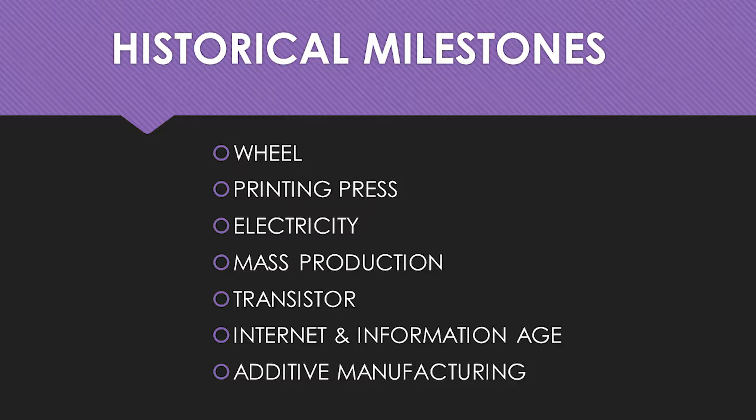I put 3D printing, or additive manufacturing, on this list. These two terms are synonymous in my mind—3D printing and additive manufacturing. I'll explain why I say that in just a moment.

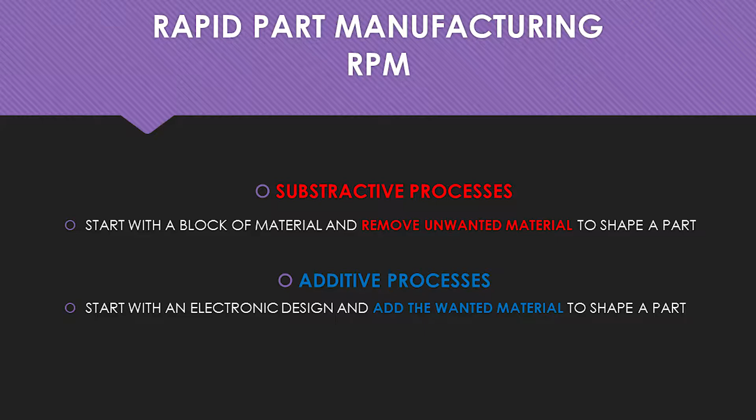Let's talk about rapid part manufacturing. There are two main processes when it comes to part manufacturing. The first is subtractive processes, where we start with a block of material and remove the unwanted material to shape the part—machining, milling, and other techniques for removing material. 3D printing is an additive process, where we start with an electronic design and add our wanted material to shape the part. Believe it or not, that makes a huge difference in how you actually build parts, and I think I can show that to you in just a moment.

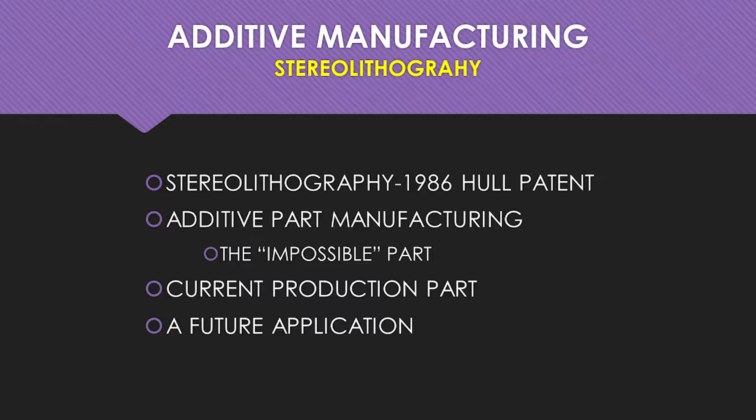This will describe the steps I'll take in my talk tonight. First, I'll describe how and when 3D printing was conceived. Next, you'll witness how an additive manufacturing process can produce a part that's impossible to make using traditional manufacturing processes. Then I'll show you how a major company has adopted additive manufacturing to produce a highly complex, high-value part in jet engines. Last but not least, I'll give you a glimpse into the future—if I were 10 to 15 years younger, I'd be printing homes in Armenia. I'll talk about that in just a few moments.

Stereolithography—the simplicity of this initial concept is most impressive. If your dentist ever hardened a filling using a light beam, you've experienced the basic concept of this revolutionary invention. My wife tells me certain nail polish is set by exposing it to ultraviolet light—maybe you women know about that. Chuck Hull is the inventor; he's now 79 years old. Chuck was working at Ultraviolet Products Incorporated when he invented stereolithography in 1983.

The company sold photosensitive liquid photopolymer inks that hardened when exposed to ultraviolet light. Stereolithography uses a beam of ultraviolet light to harden one cross-section of a part, additively, after another, until all the layers create the solid object.

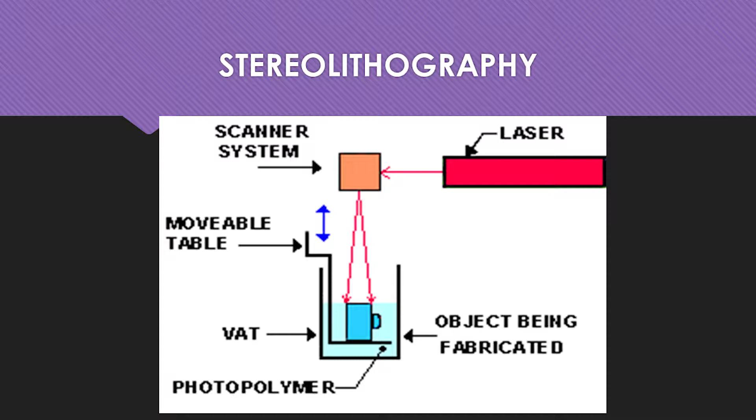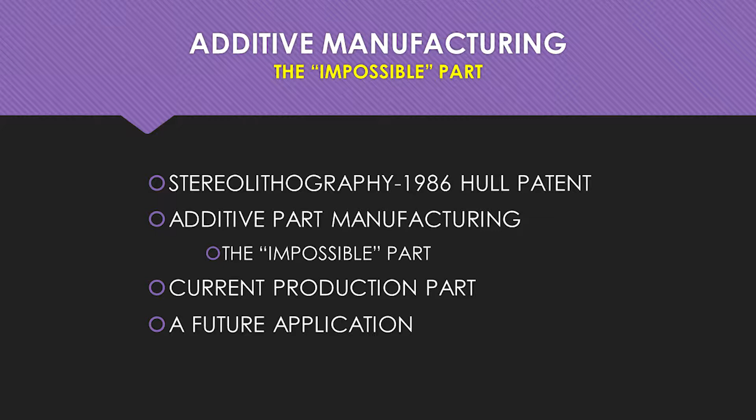This next slide, every time I see it, my mind is blown. It's this impossible part—impossible, I say, because of making it using traditional processes. May I have the next slide?

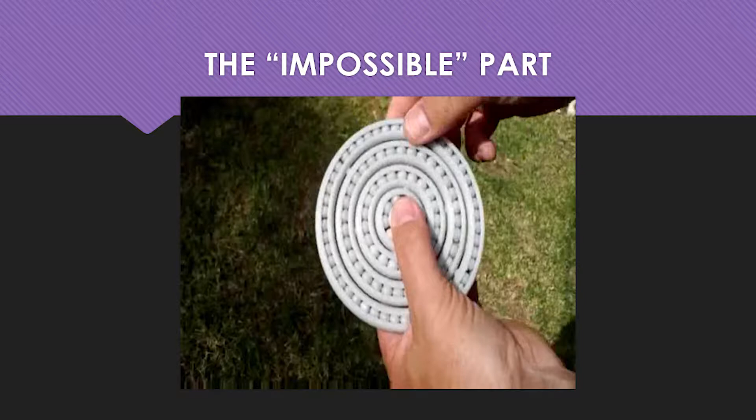Now, there's 91 tiny balls in this product. Here it is right here. If you would just move that along, stop for a moment. You can see there's liquid plastic being deposited very rapidly, and it's being guided by the electronic design of the part.

If you move it along a little faster, okay, there's the finished part. It has a substrate to it, so the gentleman will then remove that part from the substrate. If you move it along a little bit further, now he's going to remove some of the unwanted material.

Keep going, go to 3.4, 3.5. So he's loosening up some of these parts. Go a little further. Okay, here we got it.

Now look at that. That is amazing to me. I don't know if it's amazing to you, but that's made as one piece—all those parts together, all at one time, produced as an additive process. That is remarkable in my mind, and that is what is going to change a lot in the future. It takes time for these things to happen, but they will happen. It's just a matter of time.

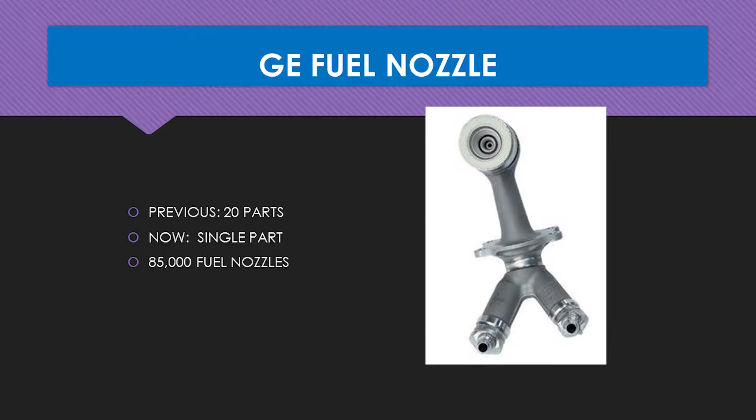If I can see the next slide. This is a nozzle, a fuel nozzle that's being made. There's 85,000 of these fuel nozzles that will be made. If I could have the previous slide once more. Okay, this is for the GE engine 90, and they plan to produce 100,000 3D printed components into that engine—not into the one engine, many engines.

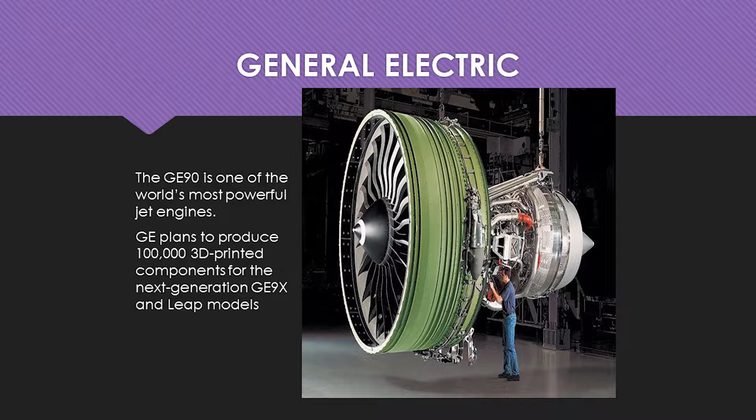Henry Ford is before our time, even before my time, most of our time. He's credited with the benefits we've realized from mass production. What was the benefit of mass production? Because we could produce many, many parts, but they had to be standardized. You got the benefit of low unit costs because of that—much lower costs than if you had to make each part in a custom manner. The benefit of additive manufacturing is that you can change each part by just tweaking the electronic model of that part, and that has a huge implication.

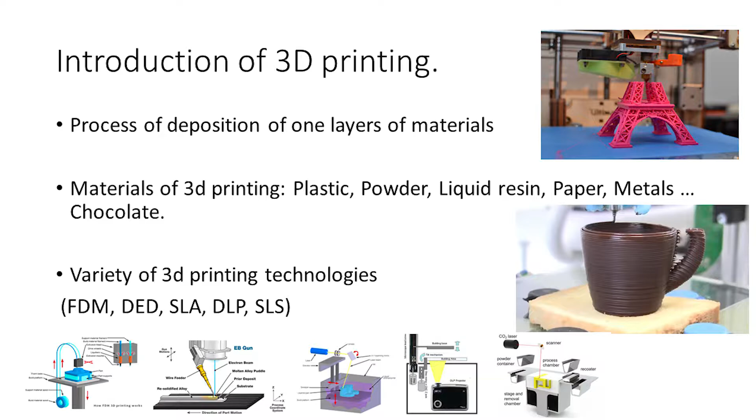There are very different technologies used for printing. I don't know if it makes sense to go through them all, but the one on the left is kind of putting blocks together. The next one is kind of soldering. The next uses a laser to put blocks together from liquid. Another, much faster way, is just projecting and burning the layer onto the object. And the last one is a powder printer.

The next big advantage of 3D printing is fast prototyping. It gives you the possibility to test your idea faster, so you can try things and see if you fail or not. For example, I have here some bottle. If you try to manufacture it in the usual way, by creating a mold and designing, it will take a few weeks, and if you fail, you have to start again. While here, it will take just a couple of hours to make this, and you can save it for next time. If you want to change something, you don't need to start from the beginning - you just open the file, make your changes, and print it again.

In this sense, I would agree with both of the previous speakers. From one point of view, there is nothing new we can actually create - it is either good or bad, and it's a question whether there's bad or just an absence of good. So in this sense, Berge is right. But on the other hand, it will change our environment and quality of life. It's not new - you could do it probably 100 years ago - but now you can do it quicker, faster, and create impossible shapes that would take a very long time, or be practically impossible to create for tiny pieces, etc.

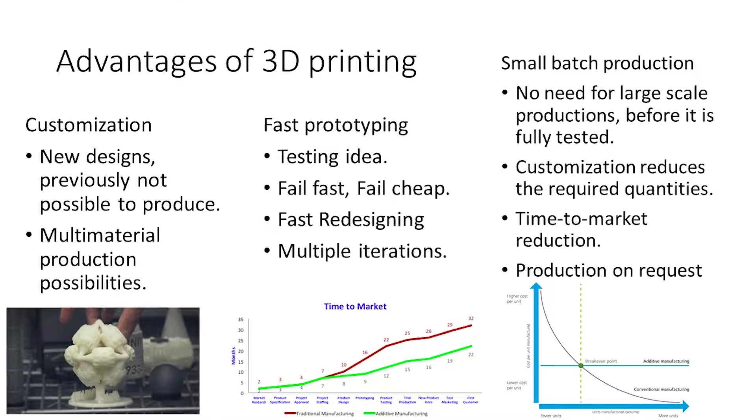Now, how will this help Armenia? Does Armenia need to go through this process? Well, everybody should follow this, and sooner or later everyone will, as the previous speaker noted. But there are some problems that could be solved right now with these technologies. Let's name a few.

First of all, it's the small market size of Armenia. It's a very tiny country. The remedy for this is small batch production, so you can just have a printer and print whatever you need for your own needs.

The other big problem for Armenia is a lack of natural resources. If there are no resources, then you have to use your brain. You have to be technologically competitive, use your human resources, and follow up on science and technological news to stay at the frontier of developments, so you can compensate for the lack of natural resources.

The other problem for Armenia is logistical dependencies in the region. It's surrounded by not so good neighbors, let's say. There are two closed borders, and sometimes conflicts or misunderstandings with others.

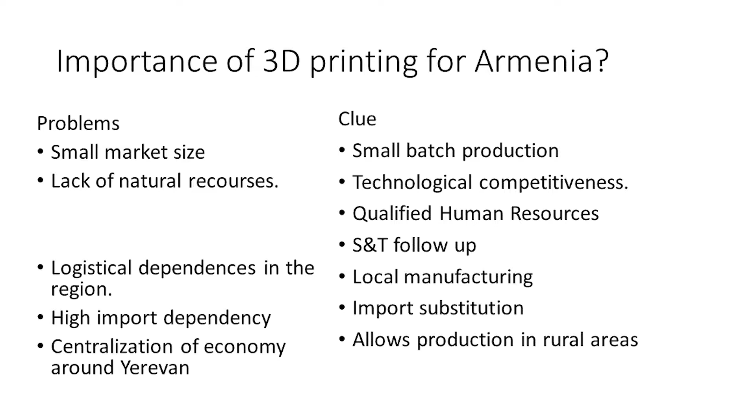This problem can also be solved by local manufacturing. If you can manufacture it here, you don't need to bring something from China or wherever else. High import dependency could also be solved partially by import substitution, and centralization of economy around Yerevan can also be addressed through 3D printing, because you can go to a village, become a good designer of 3D models, have a printer, and just print whatever you need for your community or your product.

So those are good things about 3D printing that could be useful for Armenia, but of course there are some drawbacks. For example, rapid technology change can cause your investment in technology to become useless just a few years later, because technology becomes quickly cheaper and much better over time. The machines that cost a few million just a few years ago are today about $100,000 or $200,000, and we expect them to become about $20,000 in the not very far perspective.

Another problem here is conventional mindset. In order to use these technologies, you have to think in 3D. You have to understand what this 3D printing is and how to use it, instead of thinking in the conventional way.

Lack of technology awareness is also a problem, because everybody knows there's something called 3D printing, but nobody really feels how it works and what it is. That's why you're very welcome to come see what's there and what kind of models we have here.

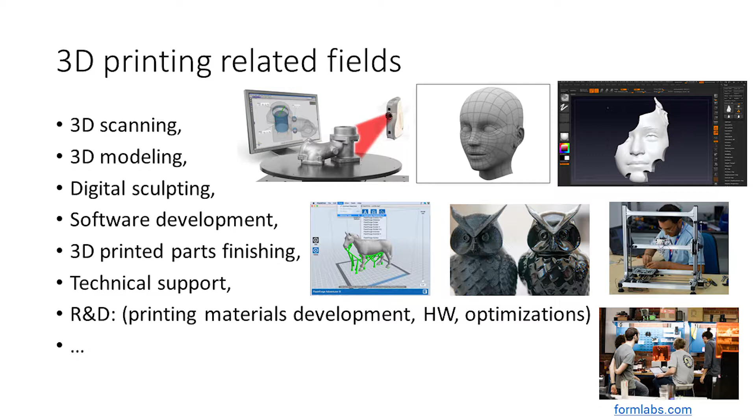So those are examples of these industries. Well, let's step forward. So, applications - what kind of applications and what kind of revolutions do we have today in this industry.

So dental industry, please click. The dental industry is revolutionized by just printing and simplifying changes in dental models. Jewelry is the next one - it's already heavily used in jewelry preparation, so you can take existing models and make modifications. There's also modeling, for example here you see a 3D printed shoe. You can print and modify the shape of your shoes as you want.

There's also an architectural revolution, where instead of bringing your model to life by hand, you can print it instead. There's also a construction revolution - you see a 3D printed house here that was also spoken about before. This is a real printed 3D house. I think it's really nice. I think only the glasses here are not printed.

The rest is printed. And there's also medical application, which you can see in the next picture. Can you distinguish between these two ears? They just look the same. And not only this, but biological parts - muscles are being 3D printed today.

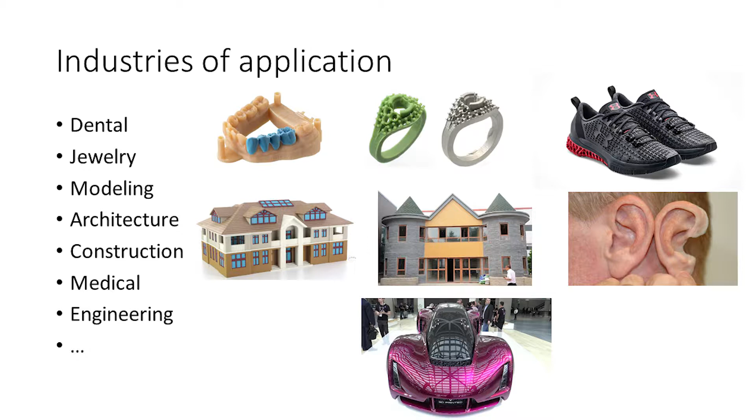It has also changed the industry of engineering. This is a 3D printed car, purely 3D printed. I think that's nice - you can print your own car and modify it for your needs. You can add something, etc. So you shouldn't be the same as all the others.

Now, how can this be implemented here in Armenia? There are many different ways of implementation. We can just wait while everyone else has it, and it will come also to Armenia - this is the simplest way. But I think much more effective is to have a kind of success story.

So if some kind of actor will start to work, just to show what kind of novelties they are, people will come and touch everything with their hands. They will see metal printed materials, true color printed materials, very fine arts and architectural pieces. So this all has to be on the table for people to come and see and be inspired. Or else they have to spend a lot of money by themselves to go see it somewhere else - but that's unreal. So I think creation of a success story is a very important thing for this.

And it should also be done together with community building. You cannot do everything alone - you have to build a community around it, support people to work in this field, and spread information about it. This event is actually one of these steps. So that's generally all I wanted to highlight today. Thank you for your attention, and if you have questions, then later.

Thank you. HRAYR, I know you have only recently come to the US - have you been able to visit any of the 3D printing centers? Yeah, today we've been at Formlabs. We had a nice presentation and show around. We saw quite nice printings, and I got one, the dental one. So yeah, it was nice. So you had your teeth fixed, is that right? I hope to do it tomorrow. Oh okay good, yeah I'm keeping it in my pocket, you know. All right HRAYR, thank you very much for your presentation. Thank you.

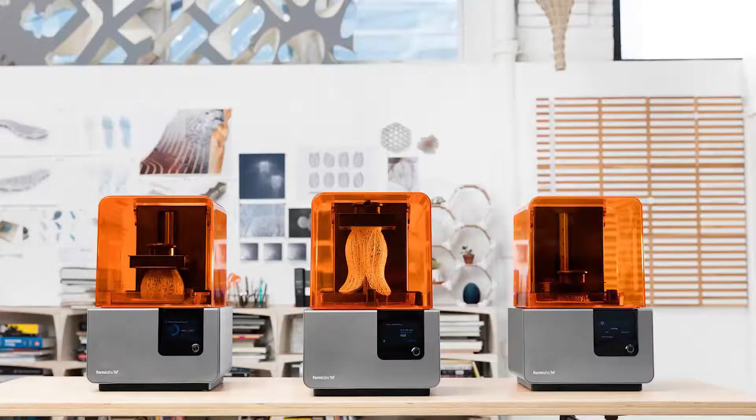So this is our main product, the Form 2. I really appreciated the opening presentation because we talked about stereolithography, which is actually the first method of 3D printing, invented by Chuck Hull in the 1980s. What Formlabs did was take that technology and we were the first to offer it in an affordable desktop package. We use stereolithography, using light-sensitive resins, and a laser to draw the shape. That's what hardens the material and builds it up.

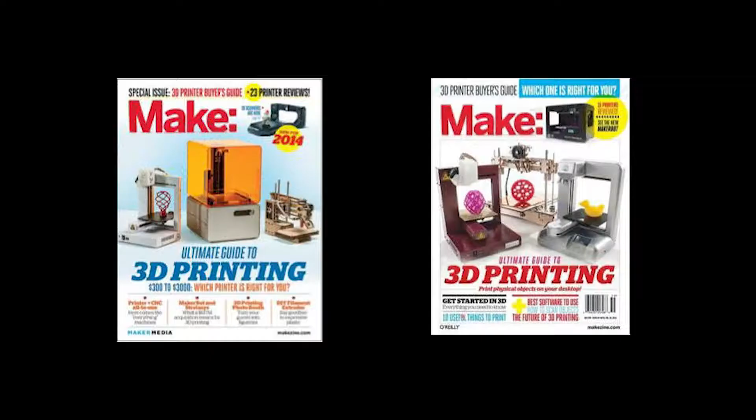It's $3,500, so that's what we mean when we say accessible. This is our original product, the Form 1, launched about six years ago. At the time, affordable 3D printers were the FDM kind, extrusion-based. This is an example from Make magazine, around 2013 to 2014. When we came out, this was a totally different technology, and there was literally nothing like it on the market, so people who knew stereolithography were really excited.

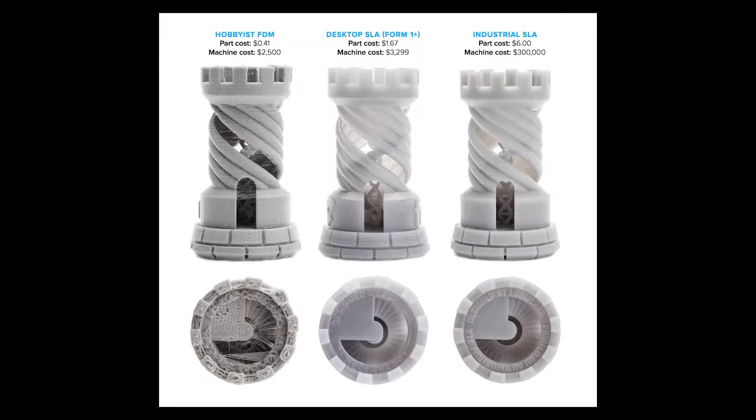This is basically what Formlabs is really good at. On the left you have an extruded piece—you can see the lines and surface details, the ridges of how it was built up on cheaper 3D printed parts. This is a piece off a $300,000 SLA machine, with a material cost of about $6. Formlabs created this new space of high quality, affordable 3D printing. Our piece is comparable to the high-end one, material cost is about a third of that, and the machine cost is significantly lower, about 100 times cheaper.

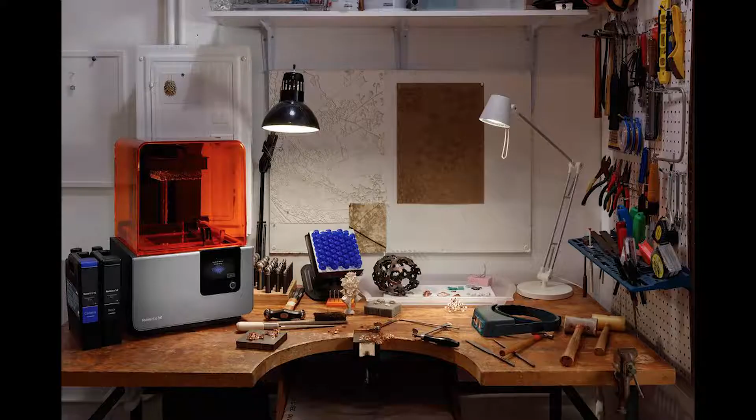This is summed up really well in the Wohlers Report, a research report about the state of trends in 3D printing. It says Formlabs defies the classification that traditionally separated industrial systems from desktop 3D printers.

This is what I've been through. The company today is 400 people. We've shipped over 35,000 3D printers in that time—absolutely more SLA 3D printers in the world than existed before Formlabs was created. We're local, we're growing, we're hiring a lot, so if you or anyone you know is interested in 3D printing, I'd encourage them to check us out.

Generally, most companies making physical products use 3D printing today. We work with big enterprises and small independent startups, and 3D printing is being used in almost every product development area you can imagine.

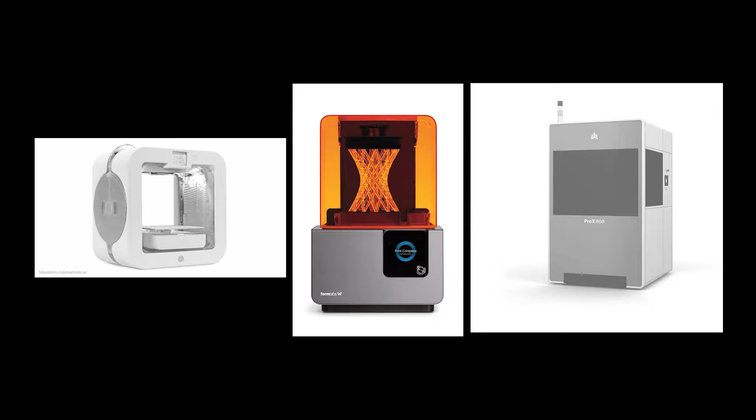This is Formlabs' methodology—we make professional stereolithography accessible. The big announcement in June for us was that we're taking the same model that's worked well for us in stereolithography and applying it to another 3D printing technology. Formlabs has announced we're working on an SLS machine, which stands for selective laser sintering. Again, these machines cost hundreds of thousands of dollars, but we've announced we're creating a product for $10,000. While this is more expensive and not in the everyday accessible range, for industries already using this technology, it's making it a heck of a lot more accessible than before.

I'll talk a little about this technology since it hasn't come up yet. SLS also uses lasers, but high power lasers. The material you're printing with is a powdered nylon.

This is similar to the process that's also used in metal printing. You drag across a layer of powder, and then you're heating it up to just below melting temperature. Then a high power laser draws the shape, actually melting the powder and fusing it together. Then that moves down, you drag across a new layer of powder, and you draw the next shape.

SLA, the original technology we showed, is particularly well known for beautiful surface finish of parts, so it's used a lot in looks-like prototyping or presentation models. Why people like SLS is that you're actually printing with nylon, which is an incredibly strong material. So this is used a lot by engineering, aerospace, or military industries where you need strong functional parts that are going into use as parts on machinery or for more end-use scenarios.

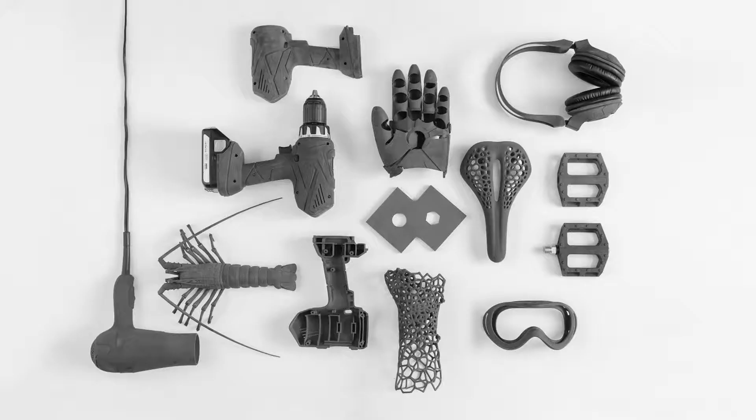This is a range of parts to cover some of the more unusual examples. This lobster was our example of a kind of impossible piece. It was printed in one go with articulated joints designed by one of our designers. The other thing about nylon is it's both strong and pretty flexible, so the headphones, for example, have a nice give to them, and the bike pedals are functional. All this stuff's been in use for some time.

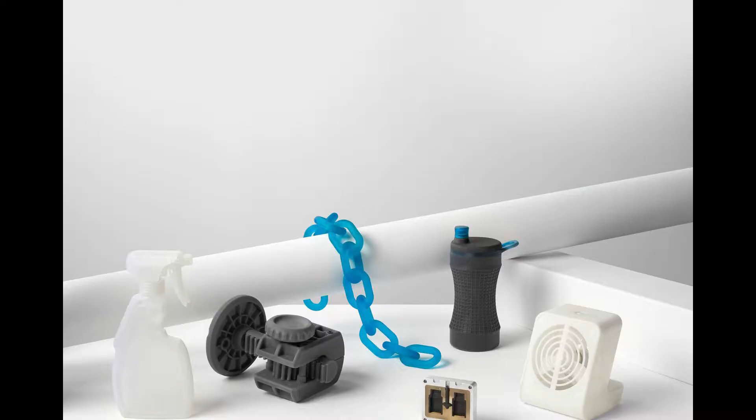The things I want to talk about in terms of the future of 3D printing that I'm particularly excited about are materials development. There's a lot going on in new materials, and that breeds opening up new applications. We've talked a lot about applications, and generally that phrase just means where 3D printing is being used in meaningful ways and in new industries. Sometimes by just offering a new material, we open up a whole new product category.

Dental already came up. About two years ago, Formlabs announced our first biocompatible resin developed for the dental market, and now dental is a huge market segment for us. So while we have a great platform, the Form 2, which is an easy to use desktop 3D printer, it's the materials that are driving a lot of the growth into new industries for us. Next slide.

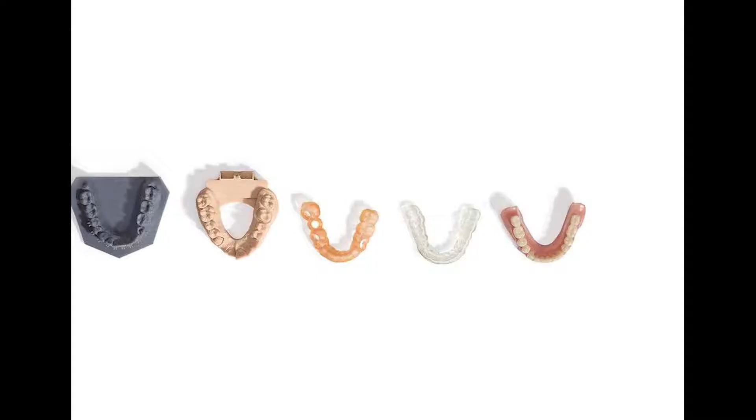So dental, I guess I can talk about that a little bit more to elaborate. There's a number of different materials. These are some of the ways 3D printing is used in dental. Our first material is for surgical guides.

In the past, if you were getting a tooth inserted, if you had a gap or lost a tooth, typically the dentist would look in your mouth, maybe take an impression with rubber, and then basically drill a hole and pop in your new tooth. Nowadays, you'll go in, they might use an oral scanner. It's much cleaner, much faster, and there's very accurate software that will spit out a 3D model for them. They print that, and it goes over your teeth, with a little drill sleeve so they can go in and make a really accurate surgery for you.

We're working on everything from models, to thermoformed aligners which came up with Invisalign - that's what they're doing, and we also do that in a much more affordable way than it's been done before. We're actually working on 3D printed dentures as well. It's a very new thing - it exists, but in terms of getting the materials strong enough that they'll actually withstand being used as teeth, that's kind of a new dental application that's emerging.

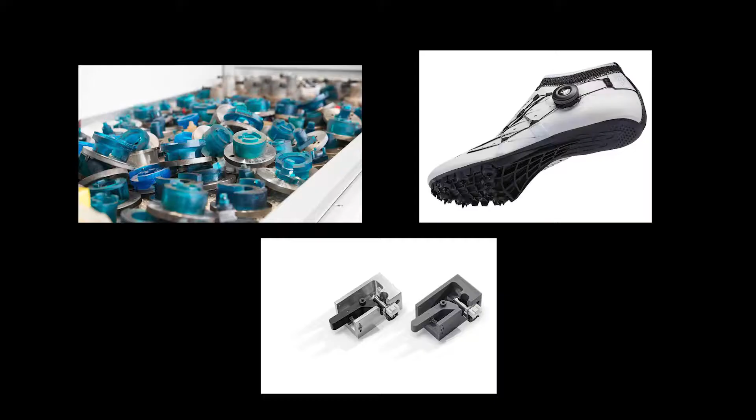Engineering is the biggest market traditionally for 3D printing. The main use case is rapid prototyping. Anyone developing a new product goes through this iteration cycle, and now they'll make a lot of models in-house. But as the materials get better, we also get into small batch manufacturing, which has come up previously. So if the materials are good enough to be used as end-use parts, then 3D printing is actually a meaningful way to manufacture the parts, not just prototype them.

This is an example of Pankl Racing Systems, who are in Europe - I don't remember the exact country they're in, but they make custom gearboxes for Formula racing teams, and each gearbox they manufacture on their line is different. These are just 3D printed jigs that they use to hold the different parts of that component while they're assembling it.

They've printed like thousands of these, and it saved them hundreds of thousands of dollars. But that's not actually the thing they care about. What they care about is the time saving, in that they were able to deliver on this demanding client job, because previously they would have had to send out for these to be machined in metal.

So that's another thing we're really interested in, is educating people. I think there's a lot of manufacturing where the tooling and everything is made in metal, and those companies are interested in 3D printing metal because that's where their mind's at, and we're kind of like, does it need to be in metal? What other material requirements would you consider plastics? Because this stuff's much more affordable, and a lot of the times it is capable. You don't need to machine stuff out of metal. So it's this sort of paradigm shift of not just wanting to do things exactly as they were done, but rethinking them for 3D printing.

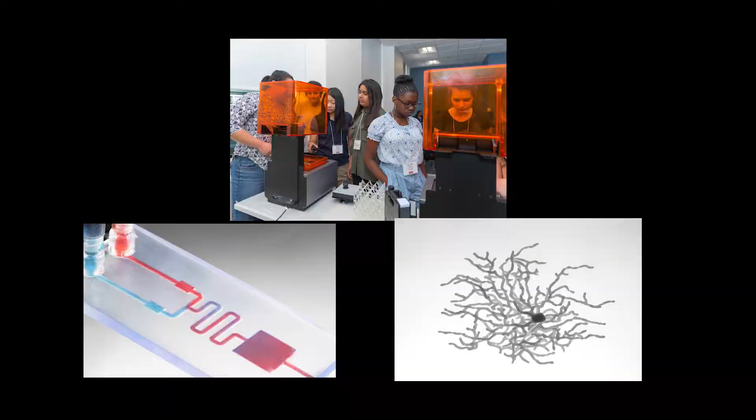And medical models for education is a huge part in people's training. There's a school in Germany doing aneurysm surgeries, and the students don't meet a real aneurysm until they've passed all their training and they're faced with a patient. So how can we improve their education to give them much more lifelike models as they go through, that they can actually interact with and do practice surgery on? It's understandably incredibly beneficial, so we have a lot going on there.

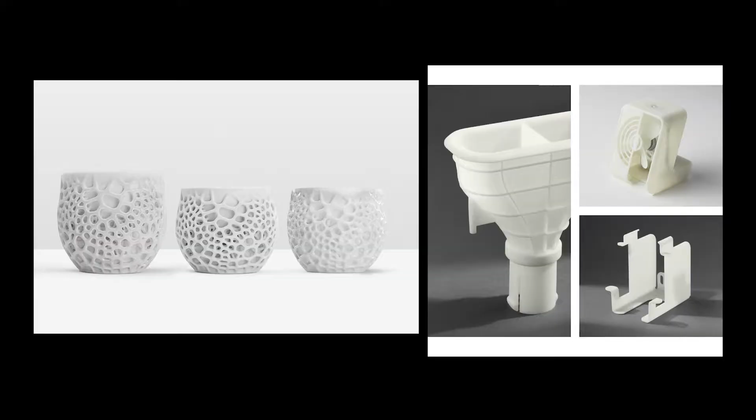Next slide. And then to materials, this is some of the more cutting edge stuff. A lot of research projects in 3D printed materials, everyone's excited about filled materials. The notion of this is with the resin-based printing, how can you load it with nanoparticles to make even more interesting materials? Formlabs has a couple of materials on the market now that do have fillers in them. One that we've announced is a ceramic material.

So this is a resin that is loaded with ceramic powder, about 50% loaded with ceramic powder. The part on the left is the printed part. Then you fire it and you're basically burning out the polymer. During that, the part is sintering, and then you're left with a fully ceramic piece. So that's one reason why filled materials are interesting, because you can kind of move away from plastics.

And so you see the shrinkage that happens there is due to that burnout process. There's a pretty significant amount of polymer. But why this is an interesting technical challenge is when you're loading something with filler, it's going to get more viscous. It gets much harder to print with.

So particularly on our system, which is very broad and user-friendly and works with all kinds of materials, we need it to be quite low viscosity, because traditionally ceramic paste 3D printing exists, but typically these are 3D printers designed specifically for that. They're printing really heavily loaded paste, about 90% filled, and they scrape it across the platform. It prints a part, scrape it across again.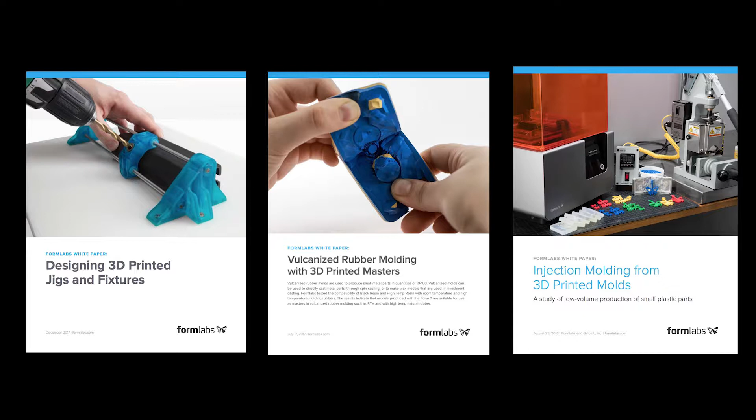This is a 3D printed injection mold to make a small ball socket joint for a posable statue someone had done. So this is huge. If you know anything about injection molding, that's how most plastic parts are created, and you're typically going to pay upwards of $3,000 for a tool, depending on the size, and it can go up to $60,000. So the issue is that when you're developing a product, that becomes a really hard stop, where once you pay for the tool, you can't really change your product.

So now with 3D printing, even if this only works for a few hundred parts, you can still prototype your tooling, which helps product development companies stay really agile. And that's a pretty big paradigm shift in how products are developed. We have examples of a robotics company in Cambridge who just wanted to make 10 parts for product testing, and they were able to do that with 3D printed tooling. That part is under $10 worth of material, so it's really cool.

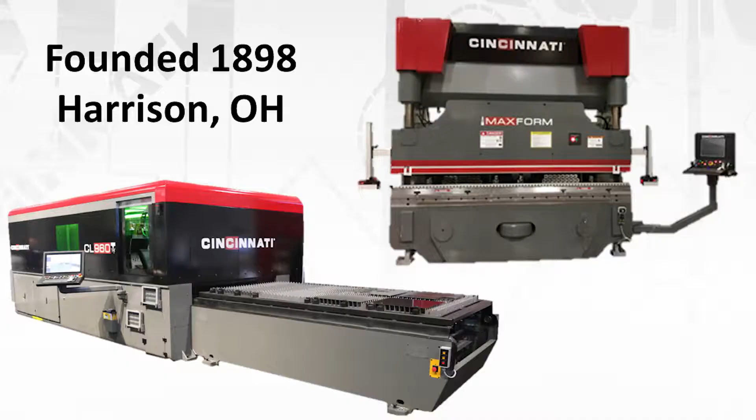Give you a quick introduction to Cincinnati. Founded in 1898, old manufacturing company. We make industrial manufacturing equipment that lasts a long time. On the bottom left, you see an industrial laser cutter, used to cut sheet metal and thick sheet stock, typically used in automotive and aerospace applications. In the top right, you see a press brake tool, used for bending sheet metal, again used in automotive and aerospace production at large scale. These are both machines that would barely fit inside this room, and this one wouldn't because the ceilings aren't tall enough. Just to give you a sense of size here.

At Cincinnati, we have two different 3D printing technologies. One's called BAAM, the other's called SAAM. BAAM stands for Big Area Additive Manufacturing, and SAAM is Small Area Additive Manufacturing. The BAAM prints a little over 80 pounds an hour, depending on the material. To put that in context, you can 3D print a full-size car chassis in less than a day at that feed rate. That machine's also about 40,000 pounds. I think maybe two of them could fit in this room, but you couldn't get it in here because the windows aren't big enough - just to give you a sense of the scale of these things.

The BAAM has a little brother, little sister, however you want to think about it, called the SAAM, which has a small footprint. It prints at a much slower rate, but it's also significantly smaller - something you could carry around yourself or with a friend. It has a feature that's unique in the market, you won't see on any other 3D printer, which is auto part ejection.

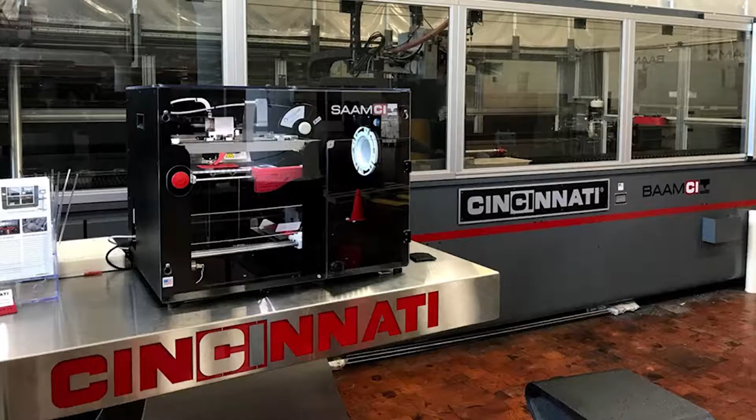I just want to make it visual - that's the SAAM in the front, and the thing blocking the entire background, that's the BAAM. Just to give you the contrast here. I like this as a story for customers interested in doing things at large scale in 3D printing, because if you're going to fail one time on a BAAM, you justify the cost of buying a SAAM to start with. The interesting thing we've discovered is if it's going to fail geometrically printing at the large scale, it will fail at the small scale first. So these products work very nicely together.

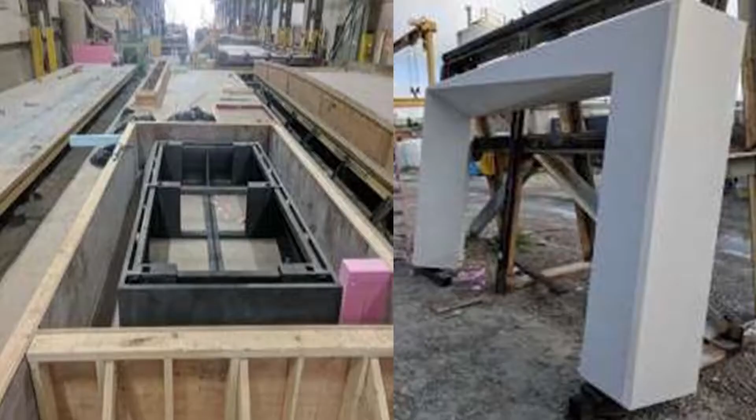Talking about construction and potential uses of 3D printing - I personally don't think people want houses that have rippled edges, and 3D printed houses are that, rippled edges. I think where 3D printing really fits into construction is creating custom molds for more unique geometries to cast concrete into. What you're looking at is a twisted archway that would be really difficult to do with normal 2x4s, but we 3D printed the mold so it was really easy to do.

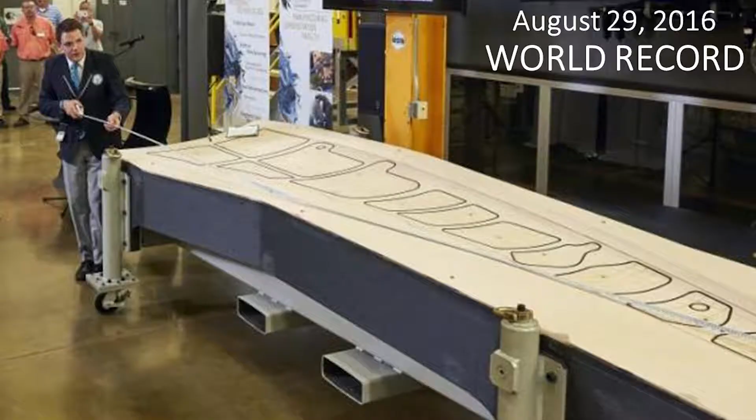This is a really cool example of a BAAM tool. We actually set the Guinness Book of World Records for the world's largest 3D printed part. This is used to stamp Boeing aircraft wings. So your airplane is made using a 3D printed tool to actually make the wing - the thing we're all relying on to not fall out of the sky.

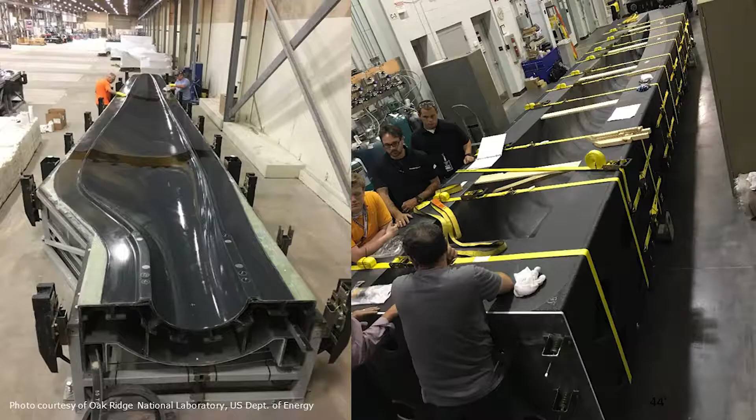Two more examples of really awesome tooling. On the left, that's a turbine blade for a GE wind turbine. On the right, this is a 35-foot long boat hull to cast fiberglass into. This thing actually weighs about 50,000 pounds - just really big.

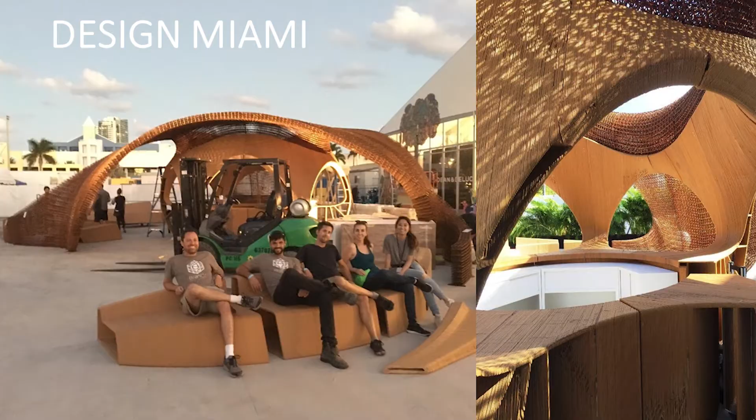For everyone that's more on the artsy side - I'm a mechanical engineer by training, but this actually caught my eye. This was at Design Miami, I think it is. It's an art installation that somebody put up, and I think it's kind of a gazebo type, a more organic gazebo, and I really like it.

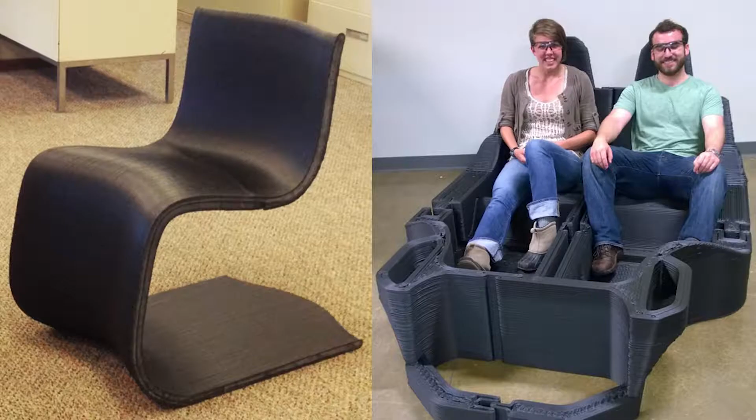I think it's a beautiful piece of architecture. Next, I've got a couple of videos coming up to show the printing of these.

On the left, that's a carbon fiber composite chair that we 3D printed. Really simple geometry, it's actually printed flat on its side and just comes straight out. You can make it contour to your body, so you could actually make a completely custom chair. If you have a crooked back, straighten yourself up, whatever the application is.

And then here, this is one of the first 3D printed cars. I think the professor had a picture of a 3D printed car in his presentation. The company that does a lot of that is Local Motors, and they actually rely on Cincinnati equipment to produce those cars. Next slide, so this is one of the first videos ever.

This was at about a 10 to 15 pound per hour rate, so we're now significantly faster than that. This is just the tool path that it follows to print that chair geometry. It's really simple, you just print it like a snake, print it up, then turn the chair upside down, and now it's a functioning chair.

All right, this is a really cool video, let this one play. This is a time lapse, so it's sped up, not real speed of the car being 3D printed. You can see that instead of it being completely solid, it has a honeycomb type of shape on the inside. That's so we can make it lighter weight, but still have the same functional stiffness comparable to it being solid.

What's the material? That is an ABS carbon fiber composite, about 20% chopped carbon fiber. Next slide.

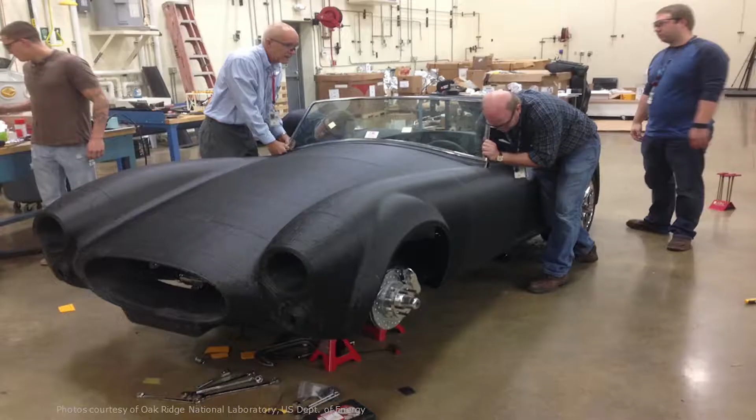I was just going to keep starting that video over. So this is a slightly different car. Does anyone recognize what car this is? Ah, there we go, that's a car enthusiast right there. Next slide, this is a Shelby Cobra GT500.

It's a throwback to a 1960s era Shelby Cobra. That's to give you a sense of the scale, right? These machines are huge next to this machine, next to this car.

We originally started out printing these parts with a subtractive mindset, which was silly. We'd print them a little bit bigger than they were supposed to be and then shave stuff away. And we said, that's stupid. So now we print them a little smaller than they're supposed to be, and then we rub a surface filling material onto it to give it that nice solid surface on the outside, to eliminate any ridges that you get at that scale when you're printing.

Next slide. Barack Obama and Joe Biden actually enjoyed taking a look at this car. This was very near the end of their presidency, I think it was like 2015 when we came up with this car in partnership with Oak Ridge. Next slide, if you would.

We've done a bit of defense work as well. This is a Jeep that was 3D printed in partnership with Oak Ridge National Labs.

And this next video is really, really cool. We're only going to play the first 30, 35 seconds of it. That's a 3D printed submarine, printed for the US Navy. That's a carbon fiber composite submarine.

The typical supply chain for a submarine is 270 days, and from idea to actually having a fully functioning 3D printed submarine, we did it in 30 days. That's a huge improvement. And more importantly, I don't know if you guys know much about submarine naval technology, but there's no metal in that thing. To sonar, it looks like a piece of wood floating in the water. It's a completely stealth submarine, which is really impressive.

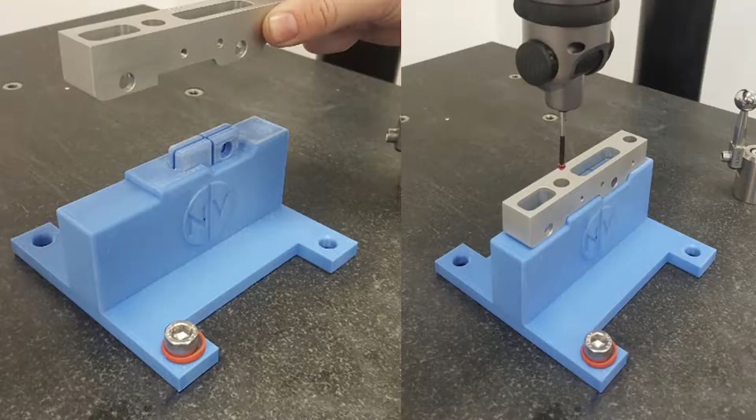All right, next slide. Just wanted to show you a cool application in the tooling space, a precision tooling application using a 3D printed fixture for quick measurements.

Historically, we measured these components on a coordinate measuring machine, but we would fixture them by hand, and it would take like 3 to 5 minutes to fixture each one. Then we created a flexural snap fit fixture that allows us to do it in less than 15 seconds and get a much higher repeatable result in terms of the angle of fixturing, so it's in the right place. This allows us to measure the parts very accurately for quality control purposes.

All right, with that was the end of my presentation. I appreciate you guys bearing with me and getting through it with me. I had some really fun, exciting pictures and videos, and I'm happy to answer any of your questions when it comes time for the panel. Thank you.

So we're going to switch gears a little bit. Up till now, we've been talking about companies that supply equipment for 3D printing. Adam, you're on a bit of a different end of that food chain, right? Correct, so you use some of these technologies and apply them in an area you think of as education. Maybe you'll expand on how your company, Einstein's Workshop, takes 3D printing into the education sector.

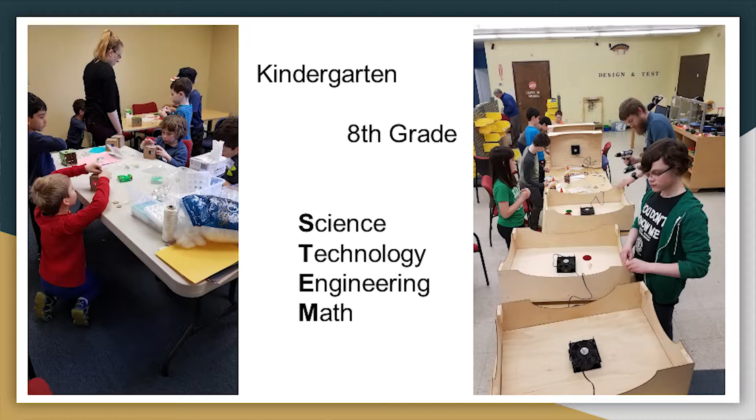Right, and actually it's a little interesting because we've been talking a lot about how 3D printers are the wave of the future, but we're going to shift gears just a little bit. My name is Adam Green, I'm an operations manager at Einstein's Workshop. At Einstein's Workshop, we teach kids kindergarten to 8th grade STEM: science, technology, engineering, and math.

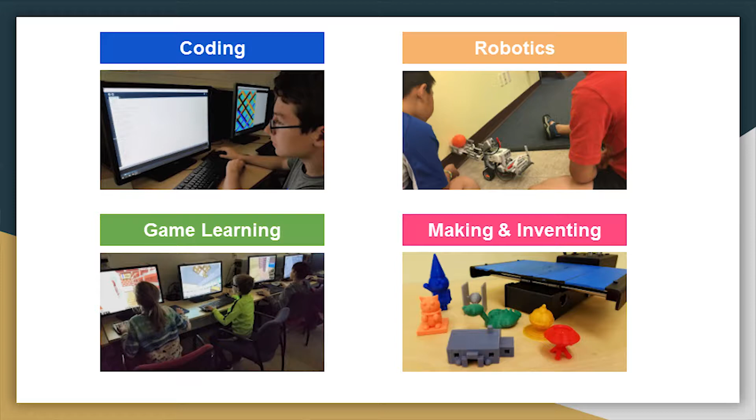We basically operate on 4 pillars: coding, robotics, game learning, and the big thing we're going to be talking about today, which is making and inventing, and involves 3D printing. This is our 3D printer station. We run 3 Printrbot Simple Metals, and we do a lot of printing. As you can tell, we're pretty prolific with a very young age group. Typically, we start teaching kids how to do 3D modeling at about 4th grade.

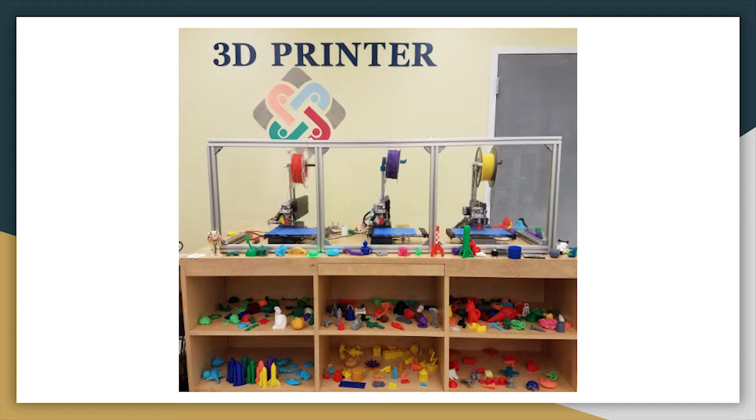Last summer, we did summer camp. We did over 500 prints in 3 months, which is quite impressive for young kids. Whenever a kid takes a class with us, they get to print 3 times. So over the course of a class, a 4th grader will print 3 of their own designs, which is really cool.

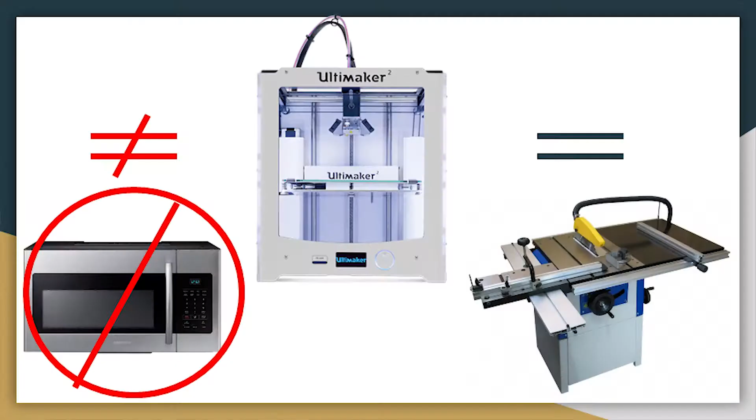Next slide. But what I'm here to talk to you a little bit about today is, as far as teaching kids, before you get to the whole 3D printing thing, it's important to keep in mind that to us, a 3D printer is more of a tool. It's more like a table saw than it is an appliance.

We've seen some amazing presentations from some awesome printers which are getting closer and closer to being able to just push and print. But there is typically some part of 3D printing where you have to know what you're doing. The printers are going to need some maintenance. You're going to need somebody who has the skill and experience to teach kids how to do this. So it's important to support your program in that way. Next slide.

I'm going to do a little something different. I'll tell you a story. I wasn't sure this would be a good idea, but I just talked to a woman yesterday who's an educator at a school, and she was telling me about 3D printers that were just sitting gathering dust and not being used. These are stories I hear all the time from educators. So I'll tell you what I hear, and hopefully help any of you who want to bring 3D printing into education avoid some of those pitfalls.

It usually starts with an administrator or teacher. They're online, or talking to friends and family, and they hear about this 3D printing thing and think, that's really cool. They do a little research online and find that 3D printers are coming down in price, you can get pretty inexpensive printers now, the software is generally free, and the filament, the material you print with, is pretty cheap. So they think, we can do this, we can do this in the school.

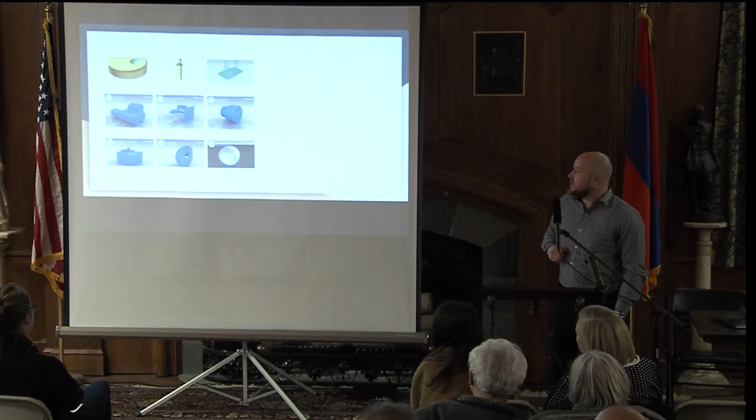Then the kids get all excited and they start clamoring, watching it print, so excited. You print this one little thing after 2 hours and all the kids are like, can I take that home? Can I take that home? You're like, no, you probably shouldn't, but Billy, he's really cute, so you give him the print, but then all the other kids are really sad. So you start printing more and more, and you just print all these models. They're going online, bringing it in, saying print this, you print it, they take it home, and at the end of the day, the printer just sits.

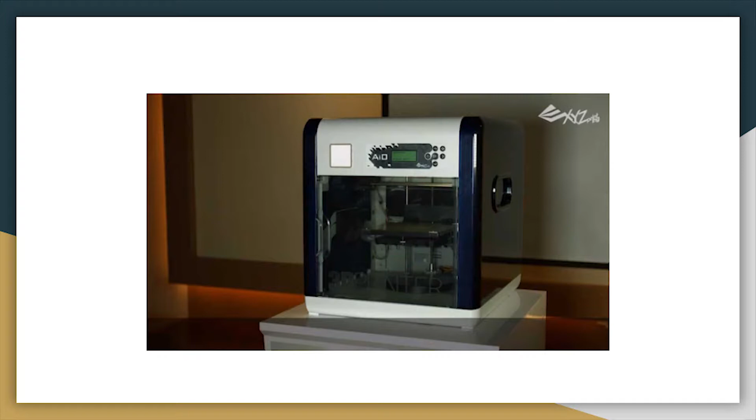Once you're done, every kid's taken home a little tchotchke, they haven't learned anything, and they're bored, they're done. So, this is a slight caveat, you should almost never print pre-made models. It's a slippery slope, happens quickly, it's a bit of an addiction. Once the kids realize how easy it is to just go online and grab something. And by the way, if you go online, people design all kinds of things. They might not even be printable. They might be designed to be printed this big, and you're trying to print it this big, and it's not gonna work. So it's good to stay away from that, and then we'll move on.

And there's the other problem, right? So let's say you do have a successful program and you're printing a ton, printing all the time, eventually your printer's gonna break. You printed a ton. Now we can just kind of move through this one.

So please budget for time to maintain and repair the printers, okay? A little bit of preventative maintenance can go a really long way. Anyone who runs 3D printers can tell you, you don't need a lot, especially, and I'm mostly talking about the less expensive models because that's typically what schools are getting. They're getting printers in the few hundred to maybe $1,000 range, unless they get some really nice grants, which again, I'm encouraging funding to get good printers. Just a little bit of TLC will really make a printer go a really long way, but they have to know how to do it.

So these are my cardinal rules. Make sure you support the program, both in time and budget. And then the second part we're going to get into right now, which is the education part for kids, is to focus on the modeling. We've been talking a lot about the printing aspect of this and how all these advancements and all the cool stuff you can do with the printer, but the printer doesn't do anything unless you model something. And that's where I think the opportunity for, especially young kids as they get older, engineers, they can do all kinds of cool stuff. But let's start with some 3D modeling.

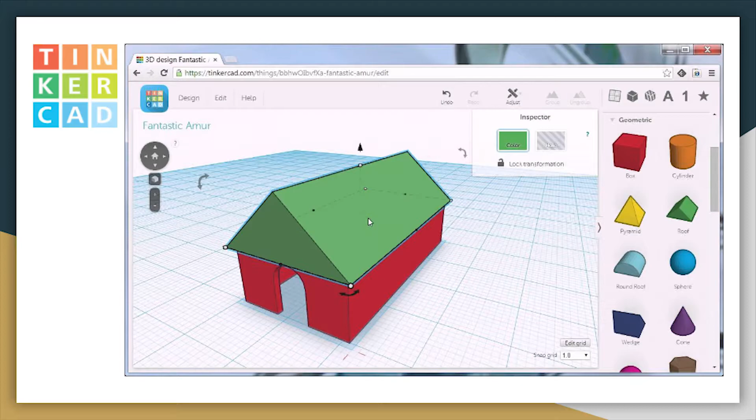I'm a little biased though, because BlocksCAD is a software that we developed at Einstein's Workshop. And the reason we developed it is because we wanted to give kids a way to create really great models, but to also learn a little bit more than they would be if they were just dragging and dropping shapes and just creating sometimes kind of a blob, right? So in ours, you're actually writing code to create these models. You're dragging out different shapes and you're adding code to translate. Some kids have done stuff like this with a program called Scratch, where they're learning coding. So they're gonna learn coding, operators, and all kinds of cool stuff.

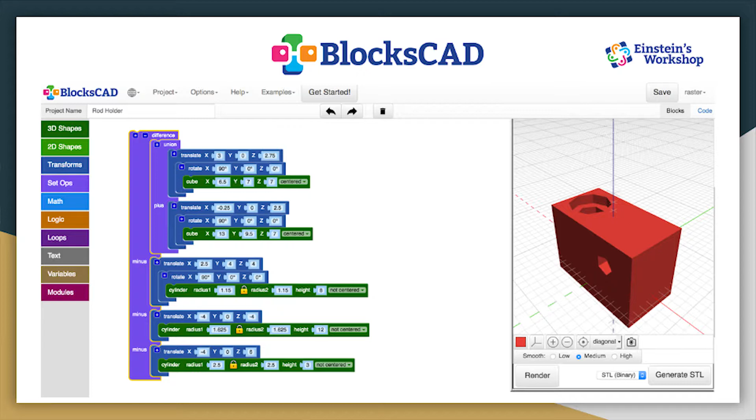So you can kind of just click through the next ones. This is just to show you that as they're going through, they're going to be learning operators and loops, and they're going to be creating and drawing on their imagination. They're going to create these amazing structures. And now they've created something that's worth printing. You're going to print this, you're going to be proud, they're going to be proud, and you've got this amazing thing that you've worked on to get this result.

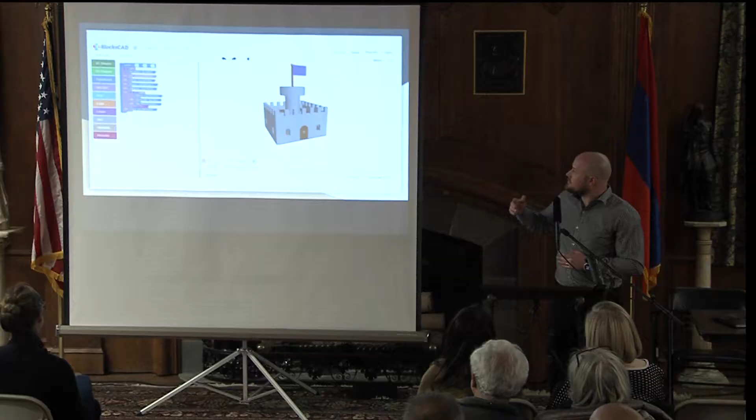Next slide. And don't worry, because they will grow, they'll get better, and they'll develop into the technology. They will start experimenting with the different ways you can use this technology. They'll start to learn. The printer will come, all of that cool technology will come, but the experience of the modeling is what's really going to generate some amazing innovation on the part of the children.

Adam, thank you. Let's hear what you have to say, Chris.

Chris is a program manager at Microsoft Garage Makerspace. And in fact, in Armenia, we have a Microsoft Innovation Center. Oh, great. And we are just starting to get Microsoft to innovate around 3D printing there. So awesome, we're looking forward to hearing what you have to say.

Okay, great. Well, thanks everyone for coming out. Thanks for having me. My name is Chris. I work at Microsoft in Cambridge. It's a relatively recent job for me. So I'm going to talk a little bit about my personal experience getting into 3D printing and why Microsoft is interested in 3D printing, and specifically why it set up a facility here in Cambridge. It's probably not what you expect.